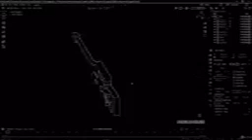In this video, we will start to add some details into the stock there. So yeah, we will consider this piece as stock. There's two pieces here, which will be the handle, the grip, and then we'll consider this as the body of the rifle. And for each part like that, we'll have a video on how to add details on it.

But first of all, I would like to clean up some lines here, just to be sure that everything will go well. And what is good with Blender 2.8 is that you can go in multi-editing mode just by selecting multiple objects like that, and you can go into edit mode like this, okay?

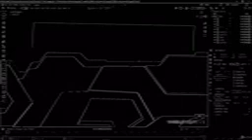And what is good with that is that, for example, here we have three faces that belong to three different objects. And now we can just select the three faces as we want and manage them how we want, okay? And this is really good because it wasn't possible to do that in the last version of Blender.

So let's go in side view. You can see that it's not totally straight, and I would like something totally flat here. So I will make SZ0. And like this, it will make everything flat. And I will make this everywhere that I feel that my geometry needs to be parallel to the ground, okay? So I will make SZ like that everywhere I need.

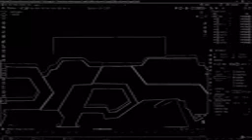Again here maybe, okay, this is a good place. Again here. And like that, just before starting to add some details here and there, we are sure that our lines are clean and well in place. Like for example, there's two here, very good to use this new feature, very easy. Again, a little here and there. And even inside, you will see that it will help us a lot to manage this kind of task.

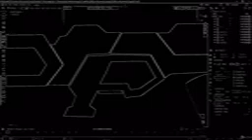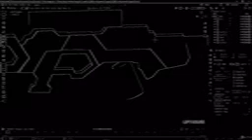So maybe I will just make something like that to be sure that I have something good here. Again, this one will be like this. There's two here. So now I go into wireframe mode and I can select here the two faces that I need and make a SZ0 as well, okay? And it will be the same for the top line here. What I would like is only one straight line, and you can see that here we have something that is not really how we want.

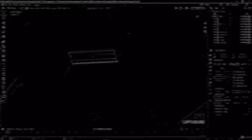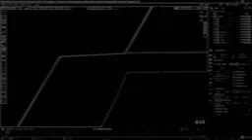So what we will do for that, we will just manage the two faces first, okay, and we will make a SZ0. Good. And SZ0 as well with this one. And actually we'll take the three here, just to have a straight line like that. And after, just verify well that you took everything. For me, it wasn't the case here. I think I made a little mistake over there. Yeah, I didn't take one here. There are two, and here there are two as well, okay? So SZ0 to be sure that everyone is flat.

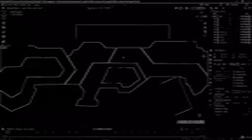And then I have somewhere that I will have to remove vertices here. I will show you that after, when it will be time to clean up the model, not in render, no, in solid mode. Here we will have to clean up some vertices. It will be easy after. And then after, yeah, it's not that bad.

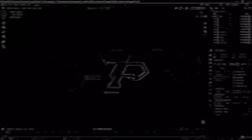Maybe here the cut is a little too far from what I think, because we would like to follow these lines here, and here this one is not really parallel to this one. So to do that, again, I go into wireframe view, and with B I can select the vertices and make a GY, just to be sure that everyone is more or less parallel to this kind of design. Okay, and now we have something far cleaner than before, and we can start to add some details into the stock.

Okay, so the stock itself, we will select it, and it will be divided by two first. It will be two big parts. So what I will do, I will make Ctrl Shift X, and I will try to make a good cut here over there with the line option. Okay, and as usual I will start to make something that will work.

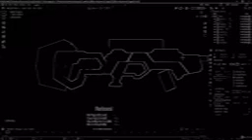So we'll try to take this, go over there, here, follow the lines, go in the middle, and maybe take a cut like that. Okay, good. And with this, now with the shift key, we will keep the bevel and hit the space bar, and we will have our model here. Okay, so we will have more or less two models like that, and we will add some details into them. So how to add details, and what will be the workflow for that?

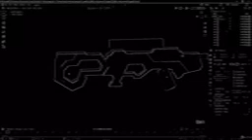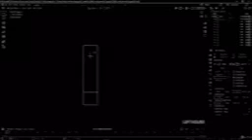Basically we will take the object, and with Ctrl I we will invert the selection here, and with H now we will focus only on this object. Okay, the goal for that will be to have something with bevel shapes that we will add with, again, the Ctrl Shift X by selecting the object and the line.

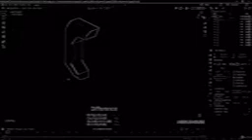Okay, so what we will do, we just add some nice bevels where we find that it's good. Just removing some parts like that here and there. Here I'm in front view just to show like that. Maybe I will make a little cut over there, so you can turn around your model and find some good and interesting shapes that can be removed. For example, I would like to remove this one, and it will cause a little cleaning after, but it's not really a problem.

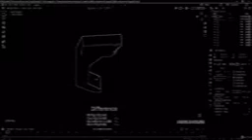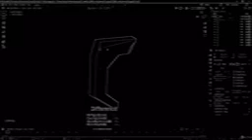And then after, maybe we can take something like this on the top and make a cut over there as well. Okay, and again maybe it will need some cleanup here at this point, because here it's not really beautiful. But just go now with escape and manage that in edit mode. So we'll take these two vertices here and we'll make Q at last, if you did manage your shortcuts well, and as well for this one, Q at last, and we will have something cleaner now.

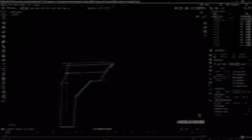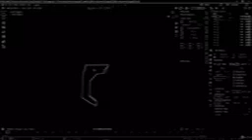That will work well. Okay, what we would like now, we will go into the add-ons here, and with the fast curve we will just make a mirror X, and like that we will have the object the same on the other side as well. Okay, so with this now we have the first shape, and we can make Alt H. We did add a little of details. Maybe after we'll need to go there and sharpen edges as we need for the rest. We will see for that.

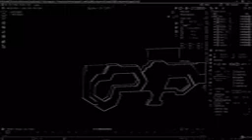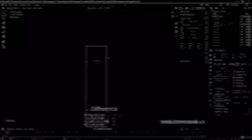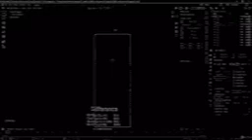Then after we'll take this part and we will do more or less the same. We'll make Ctrl Y, and to focus only on that object we will make H to hide everyone, and like that I will be able to add nice shapes to my object with Ctrl Shift X. Okay, not in perspective view, please just select your object, Ctrl Shift X. Now I can add some nice cuts, not with that tool, with the line tool here. So I hit spacebar, and I will just remove some parts just like that to have interesting shapes in our mesh.

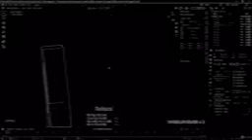Again, I use this technique and not the bevel, because I found that some nice cuts like this one cannot be the same with the bevel tool. So I prefer to use this technique. Okay, so again we will go there and add a nice cut here and there. Okay, good. Here a little of cleanup, but it's normal. And again,

okay, Ctrl Shift X. I made a mistake. Right click. The right click is a little annoying for me. I don't know what I can do for that.

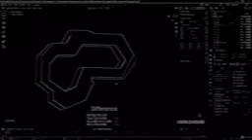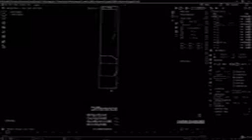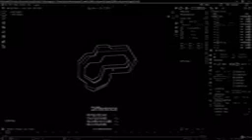Again, here we have a possibility to make a nice line here. We take it. Okay. Maybe here as well. A little bigger. Good. And maybe here as well too. Good. So now we have more or less what we want for the shape of that. I will just go with escape now and focus on cleaning my object a little.

So here I have two vertices that are very close to each other. Again, I will make Q at last and it will resolve the problem. Here it seems clean. Here it seems okay as well. Here no problem. Here we have this one that can be resolved as well. And this one seems a little too close for me. I will make the same for this one. Okay, now we have a new shape that is quite nice, and we will just again make X to have everything on the other side as well.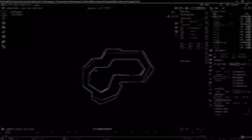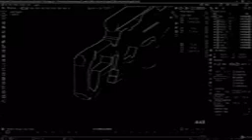Okay, good. So let's say now we would like to continue and make something even a little more interesting than what we have now. I will make Alt H, and this object will be a little thicker than the other. So I will go into edit mode, and with everything selected, I will make an SX like that to have something a little thicker. That gives more space. We'll add another cut here as well, and we will try to make something that has a nice shape. So with Ctrl+Shift+X, we'll go there and there and there.

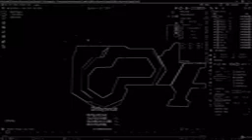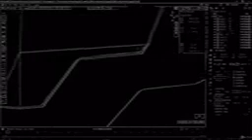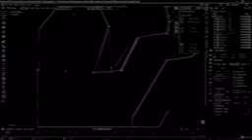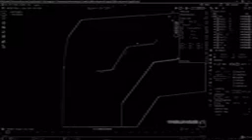Okay, and now we have this shape. Let's say we are happy with that. What you can do if you feel that the bevel makes a not really good shape because it's too close from each other, you can just reduce the bevel here if you need.

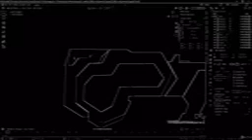Okay, we'll make an X again, so we'll continue to add our details just like that. And then after, what you can do too is to add another one over there. So that's what I will do. Ctrl+Shift+X again, coming here, draw the shape, just a simple one. And with the bevel, I will have my new object now.

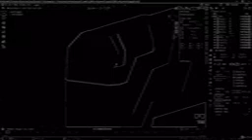Okay, maybe this one can be just a little less thick, and maybe that one can be even a little less thick as well. And you can see that now we can start to have some interesting shapes coming just like that with this system. Again, we'll make a cut over there.

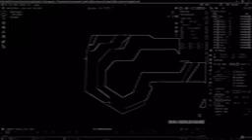So this one, nothing crazy, just Ctrl+Shift+X, and we take one here, over here, and try to make a nice cut over there. Okay, so we have a new shape here, and we will select everyone and make SX here just to add some shape into that.

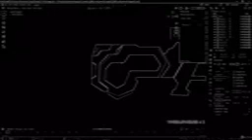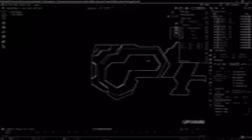So now we have something that is a little more interesting. Maybe we will see after, we can still add some more details into that, but let's focus on this one first. I would like a nice shape over there.

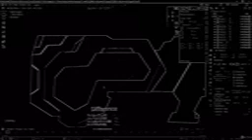So what I will do, I will just make a Ctrl+Shift+X again and go here, try to make a straight line as much as possible. And with the Rebuild tool, I will just use that like this. Again, here we will make a nice cut if possible. Starting from here, go over there and continue until here.

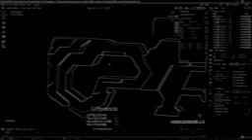Okay, and you can see that more and more we will add interesting shapes into that model. So it will not be exactly the same as the reference, because as we make something by kind of drawing shapes with lines, it cannot be exactly the same or follow a reference. And I recommend you not to try to follow everything as a reference like that.

So here I will just make a Ctrl+B to change the shape a little. Okay, and I will make the same for that one just to show, just to make something a little more comfortable. And if you see that the bevel is too thick, you just can decrease the bevel and it will remove some problems as well. Okay.

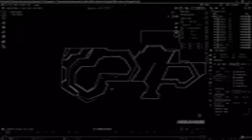Good. So now we have nice shapes over there. We can just make an X on both. Okay, like this, we are sure that we have what we want more or less. Here, we can make maybe a cut over there that will follow this line, like that.

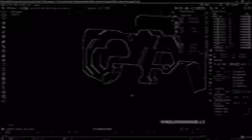Good. If I select a good object, it will be better. That's it. And now I can select this object, select everyone, and make an SX just to put it a little inside like that. Okay, so now we have just nice new shapes into our model. You can see that it really makes the difference. Just after a few cuts, we already have nice and interesting things going on now.

What I would like now, this one I would like to have really straight, so I will select the face and put it totally flat with SZ0. Like this, I'm sure that it will be really flat. And now I would like to add a cut that will continue here until there into my model over there.

So Ctrl+Shift+X again with the line. I can just play with the tool to go over there and over there, just to follow some lines and make a nice cut here. Okay, so now I can just select my object, go into edit mode, select everything and make an SX just to have something like that.

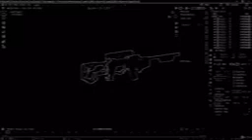Good. And more or less we have the shape that we will work with, here with the stock. Okay, we will come back maybe to it after if needed, but more or less, yeah, it will be this kind of shape that we will use.

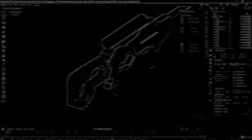Maybe what I will do, I will just select everyone there, and I will go into edit mode, select everything and make an SX a little to make it a little less thick, something around there, and I will be something around there, maybe not, with Ctrl+Z again, just a little like that. Okay, and now I have what I want.

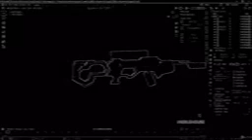So that's it for adding some details into the stock of the model. In the next video we will take a look at these two pieces: the grip and a part of the body, and we will try to make it good and interesting. After that we will follow and go along all the model like that, just to add some lines and to have an interesting design in the end. So that's it for this video. Next part, it's for these two parts.